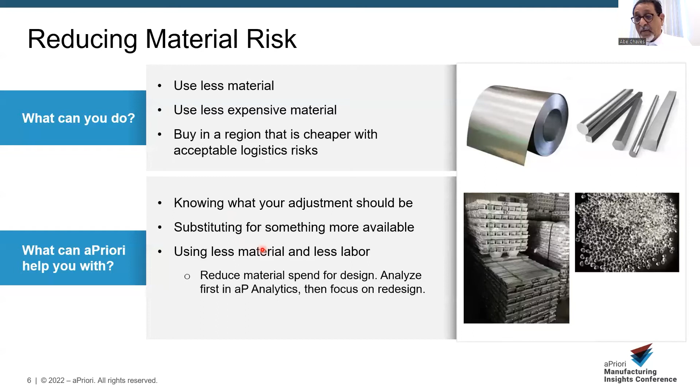We're going to show you how aPriori can sometimes be used to find suitable substitutes that cost much less and therefore reduce a lot of your risk exposure. And we're even going to show you how you can use aPriori to figure out when you can actually reduce the amount of material that you use in a part, okay? But first and foremost, we want to start by narrowing down which parts you're going to be looking at. You don't have time to go look at every part you buy, right?

So what you want to do is you want to use a tool like aPriori, where if you have costed the parts in aPriori, you can group them in different ways. So I can, for example, say, okay, let me group the parts that I buy from this supplier, and then you let aPriori narrow that down to the different processes and material types. So I can say, all right, looking at the parts that I buy from this supplier, aPriori, show me all the parts that are sheet metal and that are made of carbon steel.

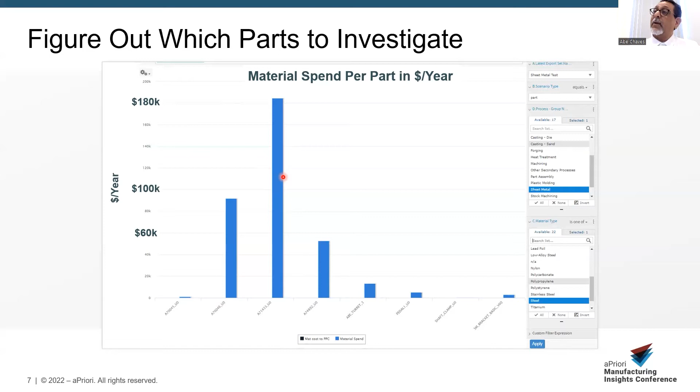And so that's the first way that we help you, is by helping you narrow down what you're going to focus on. So you narrow down what you're going to focus on. You got a couple parts that you think you need to take a look at. You know that your supplier has been asking for a cost increase, rightly so. You can't expect them to eat those huge increases in raw material, right? And so now we're going to take a look at how you can audit the price increase the supplier is giving you.

Because guess what? I've been on the supplier side, and maybe a few suppliers are going to look at each part and give you the appropriate cost increase for each part. But my sense is that a lot of the suppliers don't have time to look at each part. So they're going to do things like, hey, I make a lot of sheet metal parts. I know that carbon steel has gone up by 80%. For every 100 pounds of metal that come in the door, about 75 pounds go out the door in finished product. So that's an average utilization of maybe 75%, if I'm being a little bit conservative. And so when I multiply those two, the average increase should be 60%.

So if they make sheet metal parts for you, they're probably going to send you a note that says, hey, we're going to increase the cost of all the sheet metal parts by 60%, right? Because again, they probably don't have time to go look at every part. So you don't want to push back on everything, right? You want your supplier right now especially focused on delivering your parts, on making sure you get your parts on time.

So you don't want to make them go look at each one of your parts, but you can look at the high spend parts and say, okay, let me check that out with aPriori. And the thing is with aPriori, you can simply recost the part using the new material cost. So if my cost went from $1.2 a kilogram to $2 a kilogram, for example, I simply tell aPriori to recost that part, and aPriori will recost the material cost, the cost to make the part, the margin, and all of that.

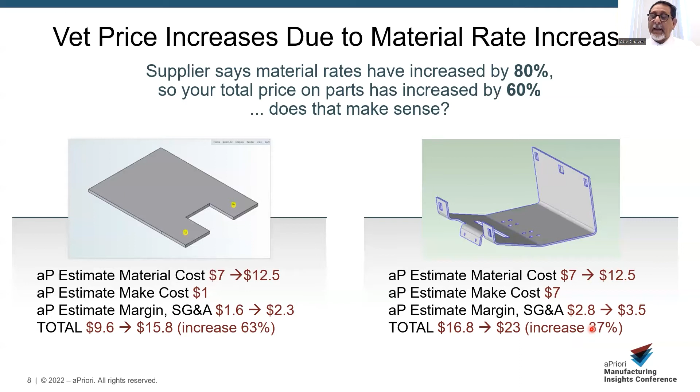And at 3,000 parts a year, that means that we're spending nearly $200,000 a year in material alone for this part. So with the recent fluctuations in material, if the material happens to double, that's an extra $200,000 worth of expense for the company. So my boss has asked me to take a look at it, keeping in mind that I can't really change much of the geometry because not only is it a part that currently goes on the boats that we make, but it's an old part that goes in many other older designs, and it's a replaceable part. So it's part of the maintenance items that we sell.

So I really can't change much of the geometry. And yet I have to see if I could reduce the amount of spend that we have in material. So one of the things that I have going for me is that I know it's an old design and that in the old days, they had more safety factor than they do today. So I want to take a look at the material that we are using here. It is stainless because you are out at sea and this is exposed and it needs to be stainless.

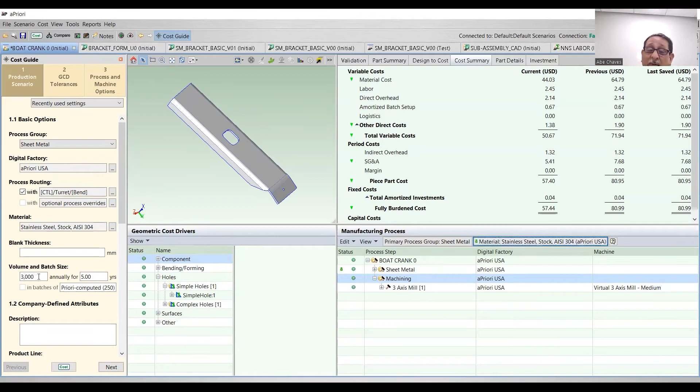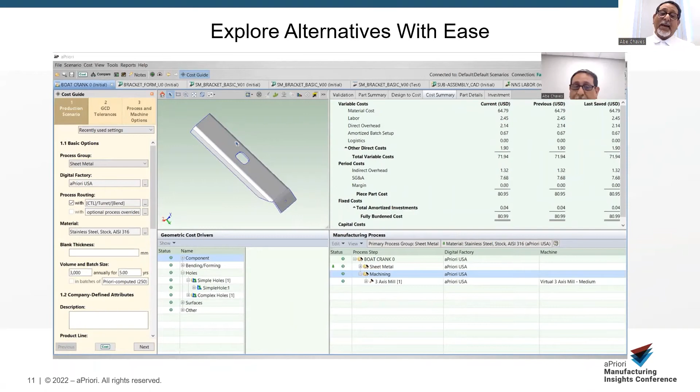And in less than a minute, you have your answer, right? It's a $20 difference. $20 difference in material cost alone, which means that at 3,000 parts a year, it's $60,000 worth of cost savings. Not only now, but it's $60,000 worth of less risk exposure when those materials do fluctuate. I hope that gave you a good sense of how aPriori can be used to perhaps explore different material alternatives. So now let's move to the next topic.

All right, so now we're going to essentially show you how aPriori can be used to reduce both labor, and by labor I mean all labor, but in specific skilled labor, and material at the same time. And the idea of using this concept actually started pre-COVID, when one of my customers essentially gave me a call and said, look, we're getting late shipments from companies that make heavy weldments for us because there is a shortage of certified welders.

So is there a way that we can use aPriori to figure out which of our weldments use the most amount of welding, so that we can then go back to our engineering team and say, hey, can you look at these weldments and see if some of this welding can be reduced to reduce the amount of skilled labor that is necessary, right? They couldn't go to engineering and say, look at all the weldments. Nobody has time for that. It's all about figuring out which ones to focus your resources on.

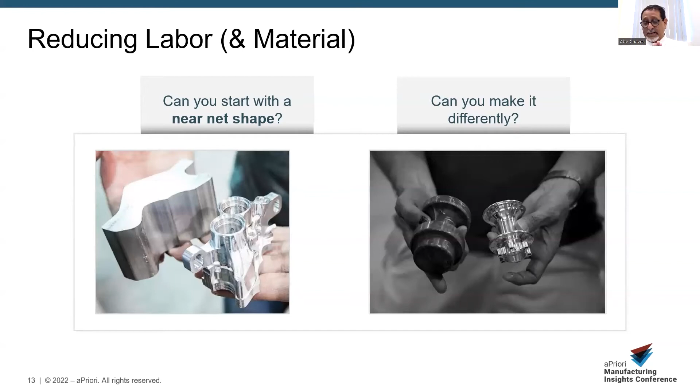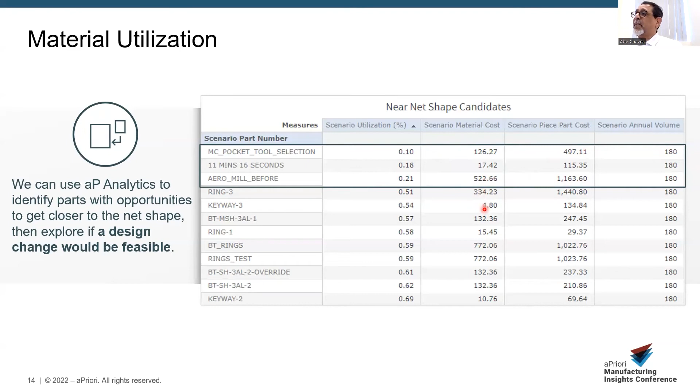And this is the original part. You can see the cost of material and the cost of making the part. The part is costing around $500 right now. We have the volume. You can see the utilization: you're wasting 9 out of 10 pounds of material, and you are consuming almost 35 kilograms of material.

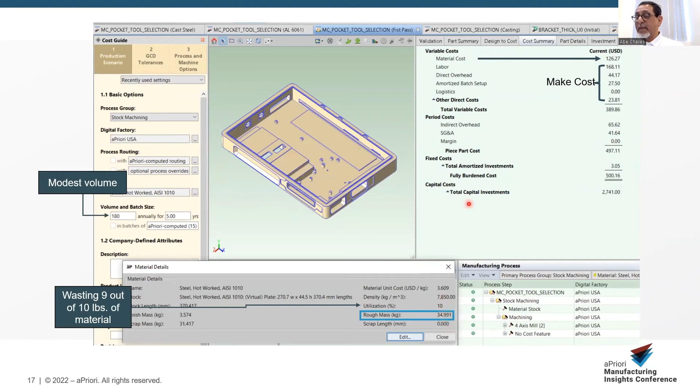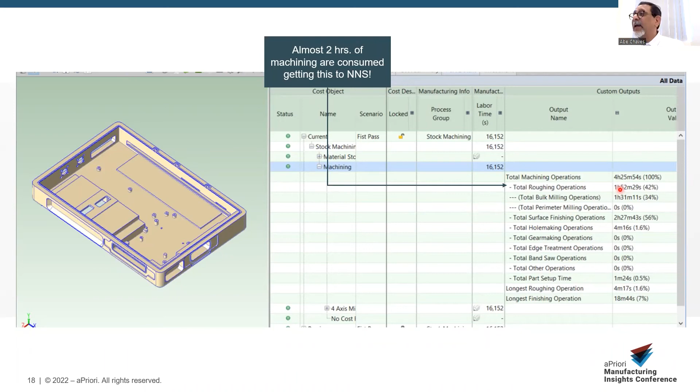So what I want to do is tell aPriori, okay, let's go try this as a casting. And yes, this is not the casting drawing, right? But the whole point is you let aPriori tell you whether it's even worth it to go and make the casting drawing. Is this really going to save me money, and how much? Is it peanuts or is it significant? So you tell aPriori that this part is a casting, that there is some machining on it, and which surfaces are machined so that you can get an apples to apples comparison.

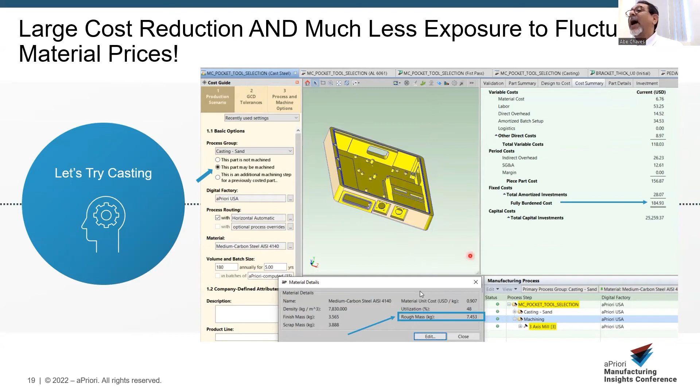And your exposure to the cost of material going up goes down significantly. So the cost of this part will not be as sensitive to a spike in material cost as it was before. And as far as labor is concerned, between the machining and the casting, you're going to be consuming essentially less than half the hours that you were consuming before.

Still significant, but not nearly as much as before. So you have less exposure to inflation and less exposure to a shortage of skilled labor.

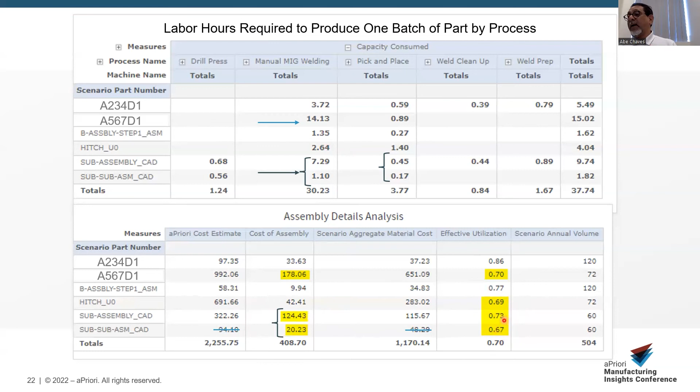So you might have some opportunity in this assembly. This hitch one also has a low utilization, but it didn't have a lot of opportunity to save a lot of the welding. So we're not going to even look at that. So let's look at a couple of these. The first one here, you can see this is the weldment cost. You're only making 60 a year, which is probably why you never even considered casting. You can see the cost right now is a little over $300, about $320.

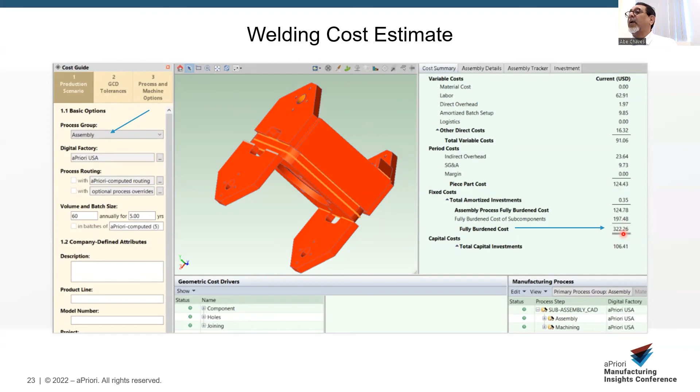You can tell aPriori to actually assume that this is a casting once you have what we call shrink-wrapped the part. You essentially take the casting and you tell your CAD system to wrap it and make it look like a part. And then you tell aPriori, hey, go cost this as a casting. Again, it's not the casting drawing or the casting model. So it's not exact, but what you want is an indication whether it's even worth it to go make that casting model. And you can pretty quickly see here that it's not worth it, right? They cost about the same.

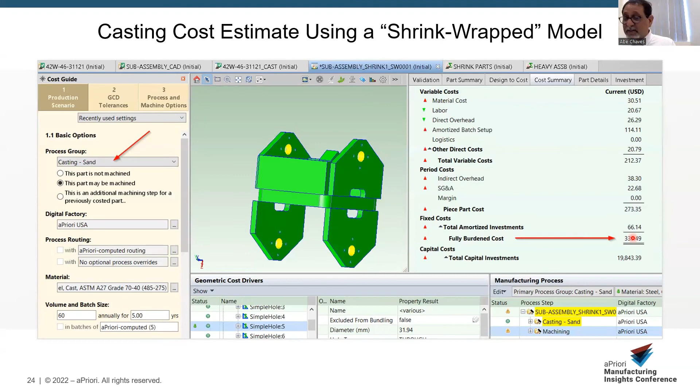So the absolute value of this number is not perfect because this is not a casting model, but it's an indication that if there are savings, they will be small, and it might even cost you a little more. So I don't worry about this one, right? Gone.

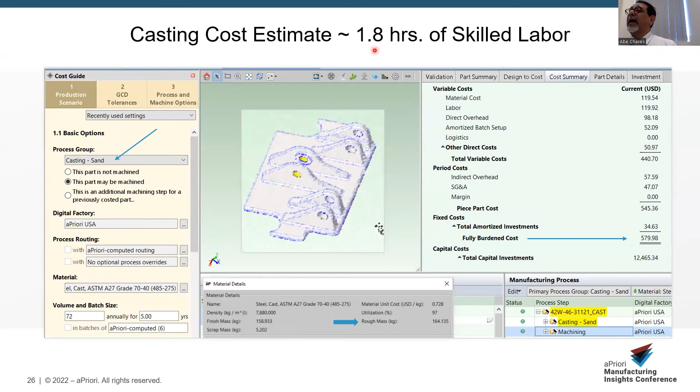And when you do an apples to apples comparison of the amount of skilled labor, meaning reducing welding on one side and adding casting on the other, you are getting some reduction in exposure for skilled labor as well.

Finally, here we want to talk about the risk of deliveries, essentially your supply chain risks, and we are going to just go quickly through this. We could show some examples, but we don't have a lot of time for this presentation. But it's definitely important to discuss. One of the most impactful ways that you can reduce your risk is really to collaborate with your suppliers, right? So let me give you a couple examples.

There will be parts where just in time is just killing you, and you're just buying maybe some batches that are good for essentially your just-in-time program, but the supplier has to continually reset up the machines, and that is consuming some capacity for them at a time when capacity is at a premium. And it would probably behoove you if you order a little more and not force the supplier to set up so many times. This would please your supplier, and you'll probably see some cost savings associated with that.

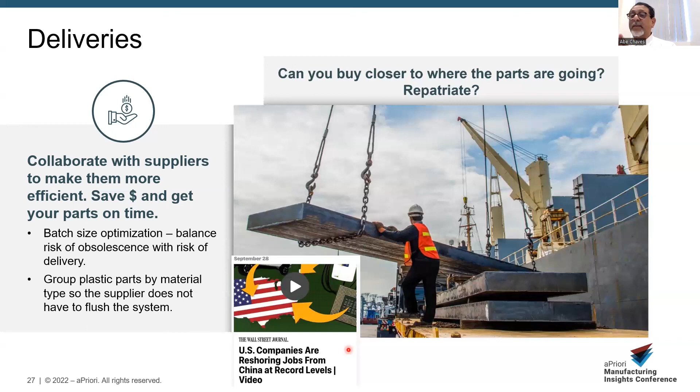So in conclusion, please keep in mind that aPriori can help you reduce and manage the supply chain risks that you're seeing today, right? We know that the best results are going to come from collaborating with both your engineering team, because if you need to change a part from being a machined part to being an extrusion or a casting or a forging, so you start near net shape, you're going to have to work with them, and your supplier, right? In material costs, look for which parts have the most material spend, check and see among those if the increases that are being asked for by your suppliers are adequate or not.

Check for possible substitutions. In material and labor, again, not to belabor it, but can you make it differently, right? We just gave you a couple examples, but there are many other ways that aPriori can help you see, hey, if I make this part this way, can I make this part that way? aPriori can very quickly show you those what-ifs. And then, once again, collaborate, collaborate, collaborate.